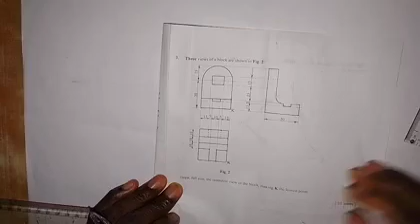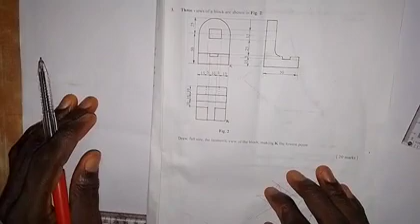Here we are going to solve this problem. As we are told here, three views of a block are given in figure 2, and we are asked to draw full size the isometric view of the block, making K the lowest point. These views are given in first angle orthographic projection. This is the front elevation, this is the plan, and this is the left end elevation. Okay.

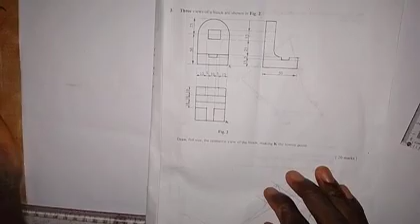So based on what we have here with the dimensions given, we are going to put this together to obtain the isometric view of this object. What I'm going to do first is to construct this L shape. As we have this L shape on the left side, we also have the same thing on the right side. Then the lowest point is here, so we need to take note of that. So let's start and see how this can be done.

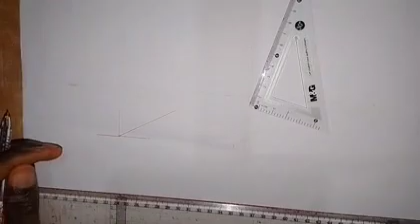What we need to do first is to draw a short horizontal line here. Then with my 30-degree set square, I'm going to draw a line in this direction, and at this point I will draw a short vertical line. As I said, I'm producing the shape of the end elevation in the form of an L, without the features that we have here. That's what I want to do first.

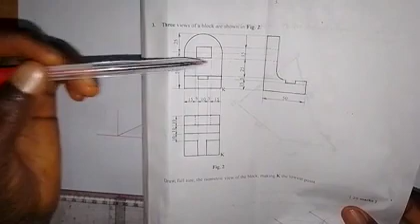The distance from here to here is 50 millimeters, and the total distance from here up here is 50 plus 25, that is 75. So I will take a measurement of 50 millimeters from here, and at this point I'm going to draw a vertical line. Then I'm going to take a measurement of 75 millimeters up. From this point I'm going to draw a short line forward with my 30-degree set square.

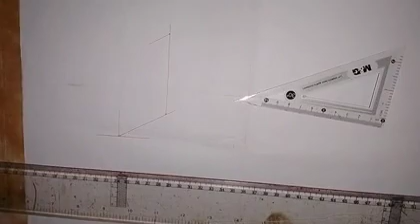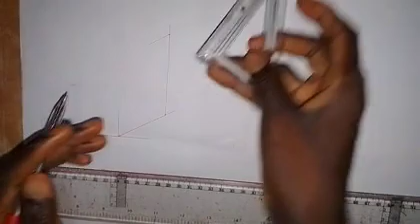Then we also need to take some other measurements. The total here is 15 plus 5, that is 20, and the thickness from here to here is given in the plan as 10 millimeters. So I need to come up here and take a measurement of 10 millimeters forward. Then I will come here and take a measurement of 20 millimeters.

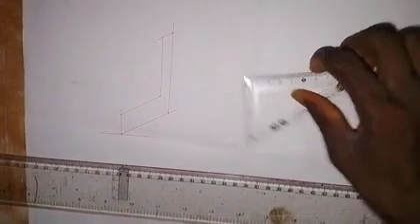Now I'm going to transfer this point a little bit backward, like this, and from this point I will draw a vertical line to join this point. Having drawn this, I'm going to take my set square. But before that, let me indicate the lowest point. We need to make sure we indicate the lowest point, as it's part of what we are going to mark.

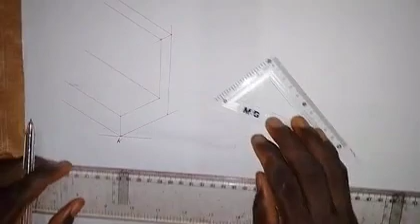Then with my set square at this point, I'm going to draw a line in this direction. Coming to this point, I will draw a line in this direction, and at this point here I will also draw a line in this direction. Then at this point I will do the same thing. Now we need to take the measurement of the width down here. As we can see in the front elevation, from here to here is 15.

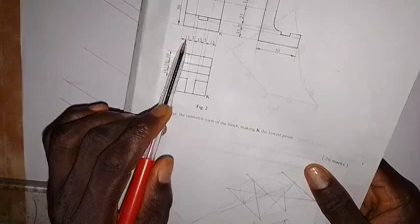So then we have what? We have 5, that is 20 plus 10, that is 30. So 30 plus 5, that is 35, and 35 plus 15, that will give us 50 millimeters. So I need to come here and take a measurement of 50 millimeters from this point, 50 millimeters. So this is 50 millimeters here.

So what I need to do here now is to draw a vertical line at this point. So here I will draw a vertical line to meet this line. Then I will transfer this point, so transfer it to this end here. Then I will also take this up, okay. Then I will complete it here at this point here, okay. So we have completed it as we see here now.

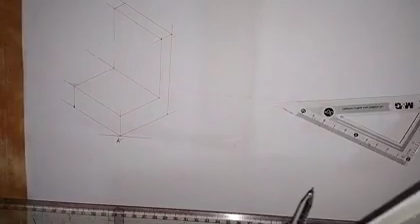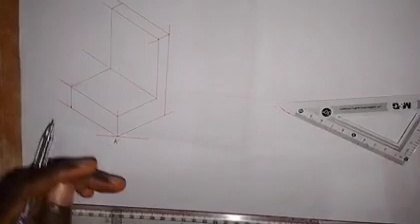So now let's bring out some of the pictures that we have here. Let me start with the curve that we have here. For the curve, we have that the radius is 25. That is the distance from here to here. That is the radius. So what we are going to do is take a measurement of 25 millimeters. So 25 millimeters down. Okay. So this is 25 millimeters.

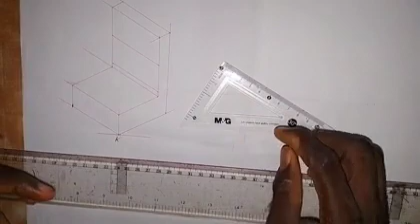So then we also take 25 millimeters down, because for me, when it comes to this kind of work, I usually use an isometric square to get that work done. So I only need to construct the semicircle, part of it, but I usually make use of an isometric square. Okay, so that's what I'm trying to do here. So I will draw like this. All right, so then I'm going to divide this 50 millimeters into two equal parts. So this is 25. So then I'm going to draw a vertical line here, like this. All right, so we have this.

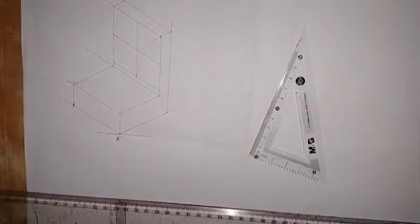So if I'm to label this, let me say this point is point A, this is point B. So for those who are just seeing how to construct an isometric circle, this is point C and this is point D here. So here I have E, okay. This is point F, this is point G, and this is point H here. Alright, so the next thing we are going to do is connect the longest corners together. So this is BC. So we connect the longest corners together, like this.

Alright, so then I'm going to connect this point A. I'm drawing half of it, not the whole isometric circle. Since it's half, we have a curve around here. So all I need to do is to join AH together. So point A and H, I will connect them with a straight line like this. That's all that I need now. So what I need to do now is put the point of my compass here at this point, and extend it to H. Then I'm going to draw an arc from here to here, like this.

Alright, so I'll put it at this point A here, and extend it to point G. Or let me take it from H here. Okay. So I'm going to draw an arc from here, just to make this line. Okay, so we have this. Alright, so with what I have here, I have this drawn. So now we also have the curve on this part. So this is what I do.

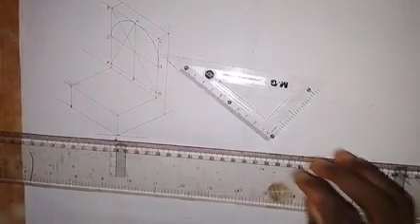So when it comes to work like this, what I'm going to do is draw a line from G. So from point G, I will draw a line to meet this vertical line. Then I come up a little bit, anywhere at a distance away from the first one. So I will also draw a line from here. Okay, so coming to this point, I can make use of this line. Then coming to around here also, I want to create a point here.

I want to create a point here, and then at this point I will draw this. Then coming here to this point, I will also draw a line from here to here. Alright, so the next thing I'm going to do is take 30 millimeters on this, but from here to here is 10, and from here to here it's also 10, so I'll leave it like that. Then I'll come to this point here and take 10 millimeters.

So from this point, take 10 millimeters, this is 10 millimeters. Here also I will take 10 millimeters. Alright, so this is 10 millimeters from here to here. Then coming here, if I take 10 here, this is going to... alright, I'll just come forward a bit, so I'll take 10.

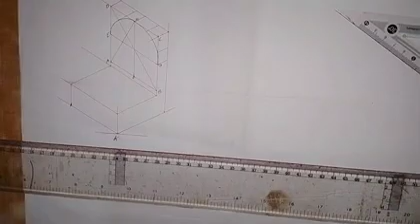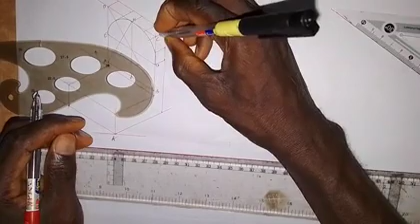Alright, so with my French curve I'm going to connect the points together. These are the points that I'm talking about. So this point, connected to this point, to this point, to this point, and then here. So I'll just come here like this. You need to adjust it to make sure the curve comes out very well. That's what I'm trying to do here. Alright, so I can go with this.

Okay, so this part, I'll connect these together. For this one, I need to make sure the curve comes out very well. So I need to use... okay, so that is what we have there. All I need to do now is to make this line a thick line. Now the curve has come out, so I can make this line a thick line at once. The other ones I still need to leave.

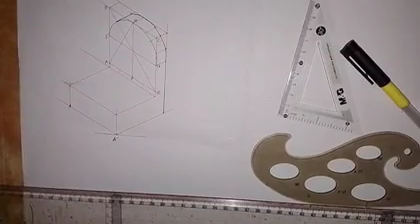So let's bring out other features that we have in this work. What are those other features? We have this shape here at the front. This is the front elevation, we have it at the front here. But before that, let me construct this rectangle so that I will not forget.

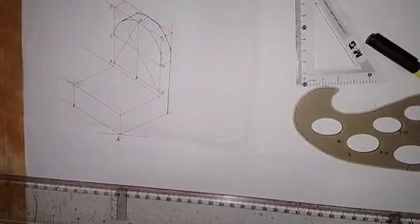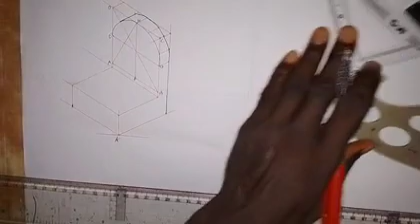For the rectangle, the length is 20 millimeters, distance from here to here, and the width is 15, and its center is 25, which is this 25 that we have here. So to construct the rectangle, I need to come to this point here. I will take 10 millimeters to the left side, 10 millimeters to the right side. Then from the center here, it is 15, but I will take it as 16, so take 8 and 8 millimeters down here.

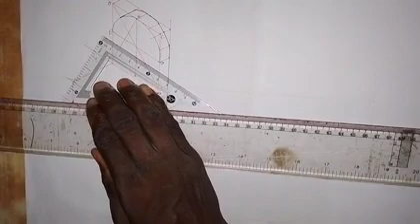Alright, so here I'm going to draw this line. Coming up here, I will draw a line, then I'm going to draw a vertical line, and draw this also as a vertical line. Now at this point of the solid object, we are going to see a line that goes in. So I need to draw from this point inward like this.

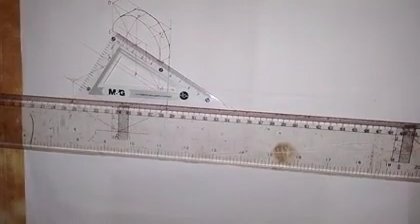Then I'm going to take a measurement of 10 millimeters from this point, because the thickness is not much, so we should be able to see the other end of this rectangular hole. So taking 10 from here, I will transfer it to this point. I want to make sure I make it thick at once. So draw a line like this, and then I'm going to draw a vertical line at this point. And all other lines I'll make them thick lines like this. Let me bring it out at once, as you can see here.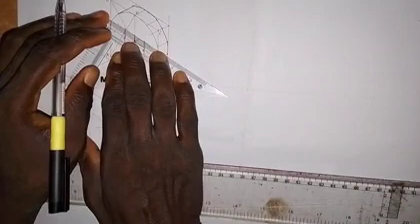And also this line will be a thick line, and this line also is a thick line. Alright, so that is the rectangular part that we have there. So we are done with that.

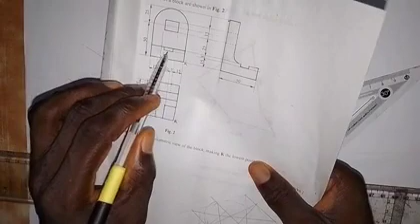Now let's come to what I said we have at this point at the front here. So here we have this shape, so it's at the front. And then from here to here is 10 millimeters. It's 10 millimeters, and the depth of this thing is 5. So I'll come to the middle of this. So in between, this is 10.

So I'm going to draw a vertical line. So here I will draw a vertical line down here, and a vertical line down here. Then I will take 5 down. So this is 5 millimeters. So I will transfer this to this side, like this. Then I'm going to take this, so it goes inward a bit. Okay. Alright, so we have that.

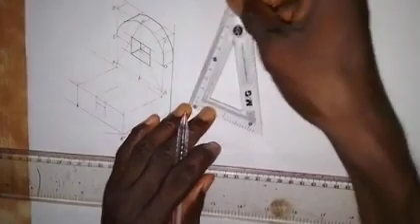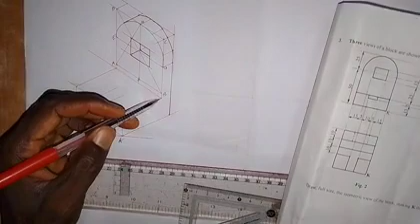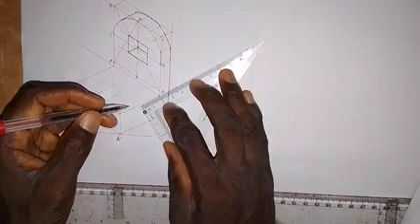Another thing that we have here, we also have it on this side here. So it's also 10 millimeters as we have here, and also the depth is 5. So I have to take 10 millimeters from this end. So from this end I'll take 10 millimeters. So this is 10. Then I will take another 10. So this is 10 millimeters.

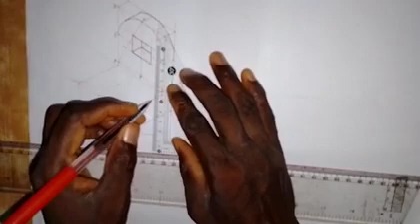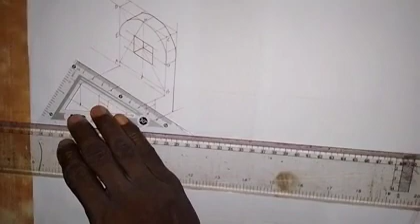So here I'm going to draw a vertical line here, and also here. Then I will take 5 millimeters down. So this is 5 millimeters. So here I will transfer it. It goes forward like this. Then I'm going to draw a line from this point to take it to the other side. So it goes like this, to the end, and also from here, so it also goes to the end.

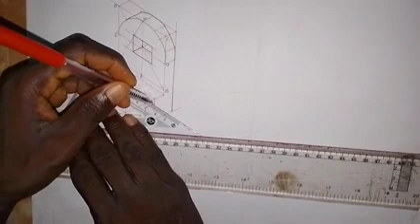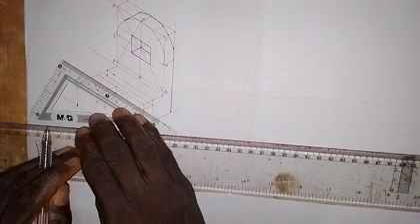Alright, so I'll come to this point here. So I will draw a line. This line, we must draw it. Okay, then at this point here, I will draw a perpendicular line to meet this line. Then I will transfer this, so take it forward here. So also I will come to this point. Then I will draw a line that goes in like this. And at this point I will draw a vertical line that connects this together. Then I will transfer this so it goes forward like this. Very, very important. So we have created those features.

So the next thing that we have here, we have a curve that connects this straight line and this straight line together. So distance from here to here is 10. So what I need to do is to take 10 millimeters up from this point. Also I'll come to this point and take 10 millimeters up. Then I'm going to create a square on this part. So here I will draw a vertical line to meet this one. And from this point I will use a line like that and then draw a vertical line.

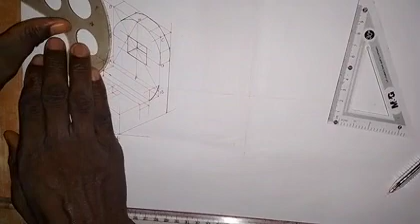Okay, so now we need to blend them together. So I will use my French curve to blend them together. So what I'll just do is to set it like this. Alright, so I can go on and join this together. Alright, so I blend them together. Also I will come here, set my French curve like this, and then I will blend them together. Alright, so all the features have been brought out.

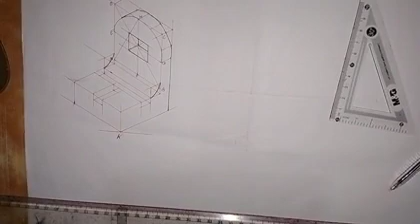What I just need now is to bring out the visible outlines and edges with a thick line. I'm using my black pen to do that. So I'm going to pause the video, and after I've done that, I will come back and we'll see the final results. Alright, so this is the final result. This is what we are asked to do. It's as simple as I've done it here. All you need to do is to practice. When you practice this, you become a master at it.